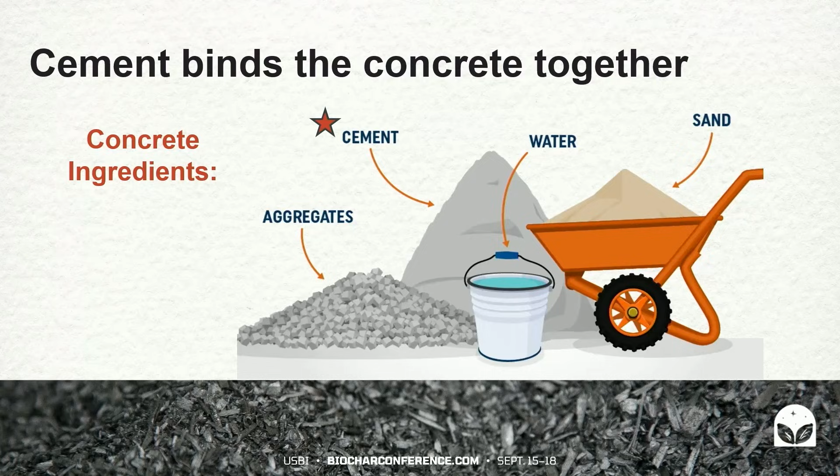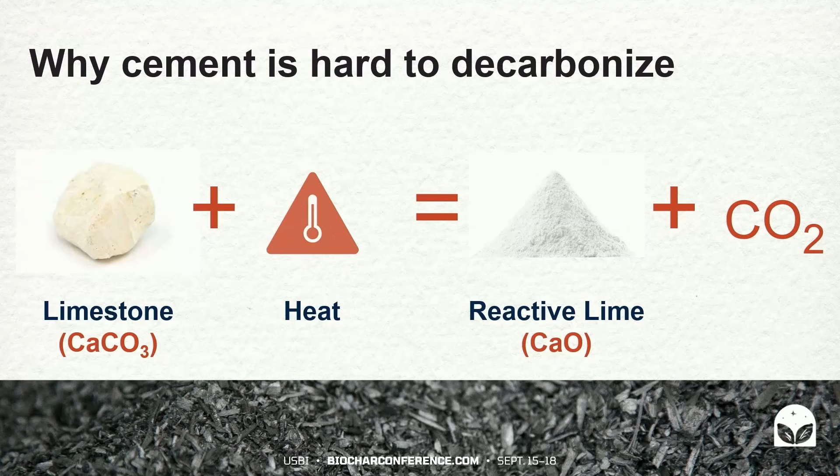That's one of the key ingredients in concrete, and it's the material that binds all of the other ingredients together. It's hard to decarbonize the cement industry because the carbon footprint is tied to the material itself. The CO2 is released during the process of converting limestone, calcium carbonate, to free lime, calcium oxide, which releases CO2 in the process. So unless the concrete industry stops using cement, the basic building block of concrete, we're really stuck with these emissions. And I wanted to find a way to change the narrative about concrete in this way.

So getting back to the question, why biochar in concrete? By replacing a portion of the cement in concrete with biochar, we reduce the demand for the most carbon-intensive component of concrete, and we store carbon that would be otherwise released into the atmosphere. So if we can put enough biochar in concrete, we can completely eliminate 8% of global CO2 emissions. That's equivalent to parking every passenger vehicle on the planet permanently.

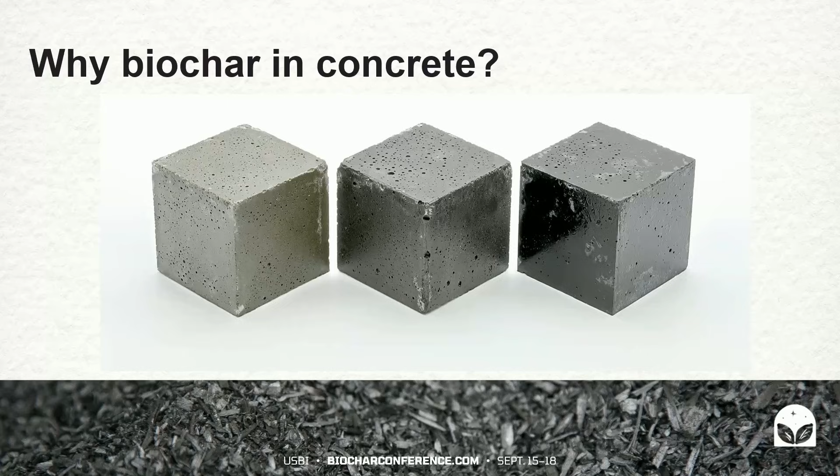But to do this, we have to have buy-in from the concrete industry. And that requires proof, trust, and consistency. In practice, every major project that uses concrete requires the materials used in the concrete to meet ASTM standards. Without them, every project has to have their own suite of testing for the materials, and the engineers face risk and uncertainty. Standards reduce this risk, build trust, and create pathways for broader use.

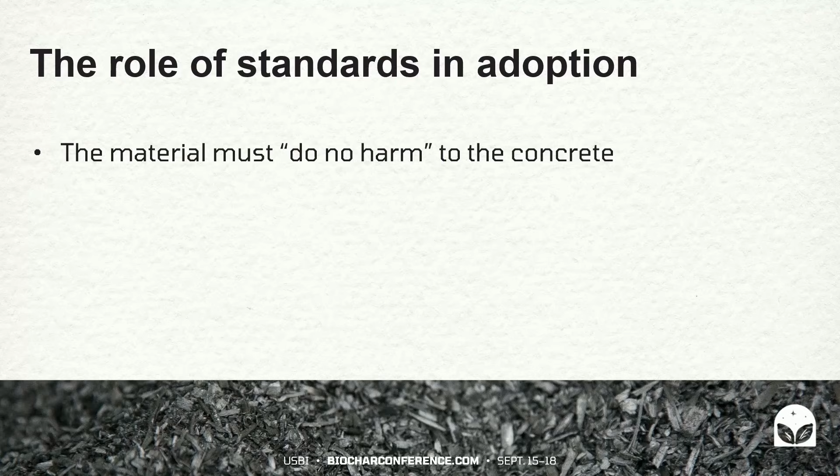In the case of biochar, a standard will tell producers how to qualify their material. It'll guide engineers how to specify it, and it'll give contractors confidence that performance requirements are met. It's the seal that people trust to say this material does no harm to my concrete. But with a material so versatile and so different than conventional concrete materials, what testing should be required for biochar?

Across academia and industry, research on biochar in concrete has exploded in recent years. When I first started in 2019, there was only a handful of papers. That has grown exponentially. I can no longer keep up with the amount of things that are being published on this. We've seen some evidence of strength improvements in some cases, durability gains in others, and of course, carbon footprint reductions almost across the board. But results are highly variable. I can name countless examples of the opposites of all of what I just listed. Feedstock differences, pyrolysis conditions, and particle properties all affect performance.

Without again going into all of the details for this, what I would say is that we've shown both good and bad results for alkali-silica reactivity testing. And the interesting thing is that what we're observing here, we don't actually even think is alkali-silica reactivity. So the test we're doing is designed to measure that property. We're getting bad results according to the test, but we don't actually think what we're seeing is alkali-silica reactivity. Some of these tests that are required for certification of concrete materials might not apply for biochar-based materials. But these tests will still be required to prove to the industry that the material does no harm.

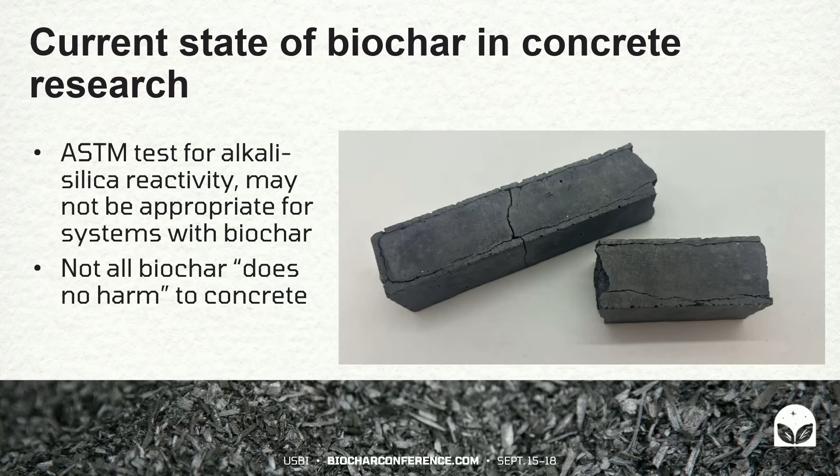Keep in mind that standards aren't neutral. They're built on assumptions by people, and when we introduce new materials, we have to ask ourselves whether those assumptions still apply. So I'm going to give you an example that's unfortunately a little close to home, my driveway to be exact. A couple of years ago, in a massive coordinated effort by the cement industry, the industry switched from a Type 1-2 cement to a Type 1L cement. Type 1L cement is really only different in that a portion of it is now a ground limestone instead of all Portland cement.

They are great under certain applications. They perform just as well as Type 1-2 cements, and they have a lower carbon footprint, so it seems like a win-win. And for the most part, it was really touted as a one-to-one replacement. So exactly the same, just replace this Type 1-2 cement with a Type 1L cement and you're good to go.

But in practice, many concrete finishers noticed a higher water demand for the product. It turns out that Type 1L cements release their bleed water a little later than Type 1-2 cements. And that bleed water is the water that rises to the top after the particles settle. So it's what finishers call the cream that allows you to kind of finish off a nice smooth surface on

the concrete. However, if you finish the concrete too soon before that bleed water rises, then all you do is trap the water underneath. And so you're left with a really porous surface layer that flakes off afterwards and leads you to something that looks like my driveway. It's very embarrassing to be a concrete material scientist and have a driveway that looks like that, by the way.

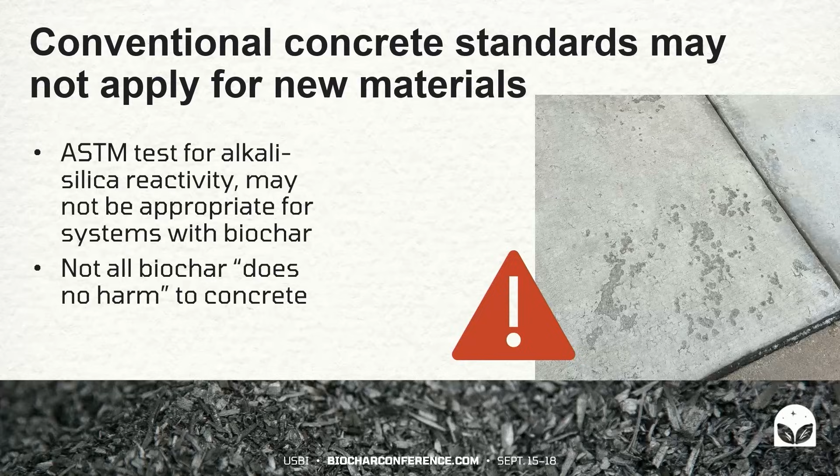Surface scaling is one thing. It's unsightly, but structurally it's fine. But structural integrity is another. So as we start considering incorporating these new materials into our concrete, we really have to be careful about how we evaluate the assumptions that go into our testing and our interpretation of data. We have to ensure we handle new technology carefully and responsibly.

So let me give you another example of where one of our assumptions didn't hold about biochar, because we've seen lots and lots of these in our testing. And again, we've seen contradictions to it as well. It's a really variable material. In our work with biochar cementitious composites, we've found that electrical resistivity and permeability don't always correlate in the way that you would expect in conventional systems.

And in case you're not familiar with this relationship, allow me to just explain briefly. Professors like to profess. In conventional concrete, electrical charge travels through the cement pore solution, so it's really closely tied to its permeability. That means the same pore network that facilitates electrical charge through the concrete also facilitates water travel through the concrete. So when you have a high resistivity material, the assumption is that you have a low permeability material.

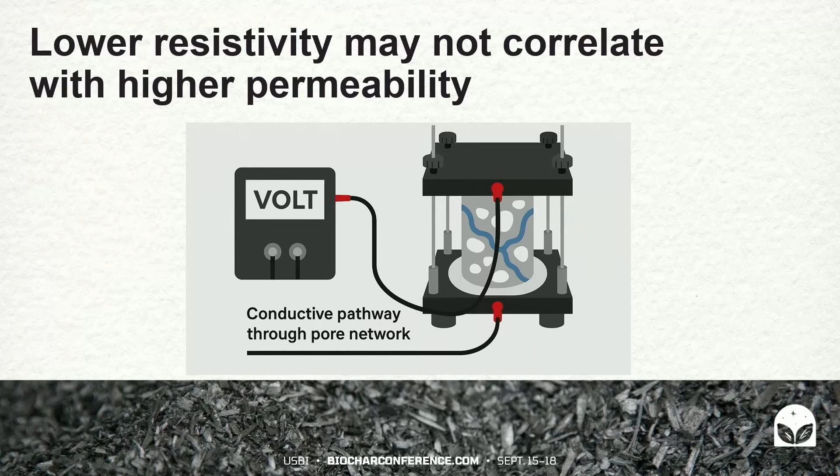So according to conventional wisdom, an increase in bulk electrical resistivity should correlate with a decrease in permeability, while a decrease in electrical resistivity should correlate with increased permeability. But instead, we show that in some cases, the biochar can both reduce permeability and reduce electrical resistivity.

In this case, the decreased electrical resistivity is attributed to an increase in pore solution conductivity, as ions from the biochar make their way into the pore solution. And so in literature, we can see claims that biochar can make concrete conductive. This may be true. We have not seen it.

Without verifying that the electrical resistivity decrease is caused by a percolating solid network of that conductive filler throughout the concrete, it's equally likely that the biochar is simply increasing the ionic strength of the concrete, or worse, increasing the permeability. The reason why I say worse is because that would have implications for long-term durability.

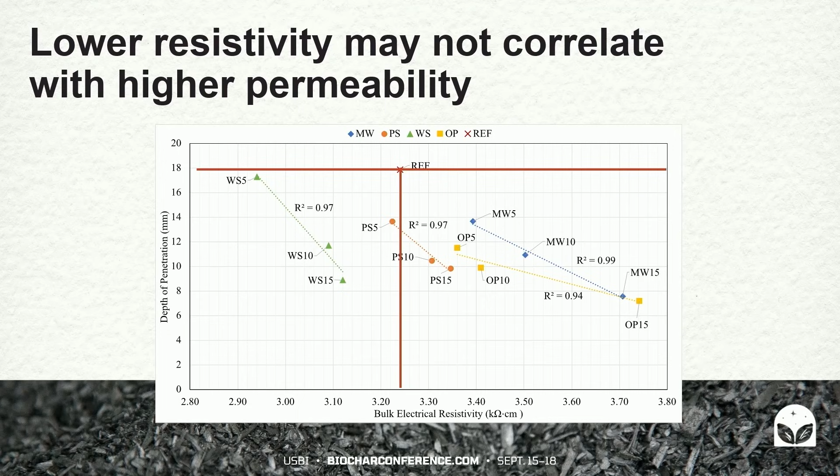Another example where our assumptions were not met by biochar is from freeze-thaw testing, so I'm glad that came up. Here again, we assumed the rules would hold, and they didn't. Again, conventional wisdom tells us that if concrete is sufficiently air-entrained, it should be protected against freeze-thaw damage. The air voids help reduce the tensile stress experienced by concrete as water in the pores freezes. So as ice crystallizes, the water is displaced into a nearby air void, and it can grow without causing expansive pressures that damage the concrete.

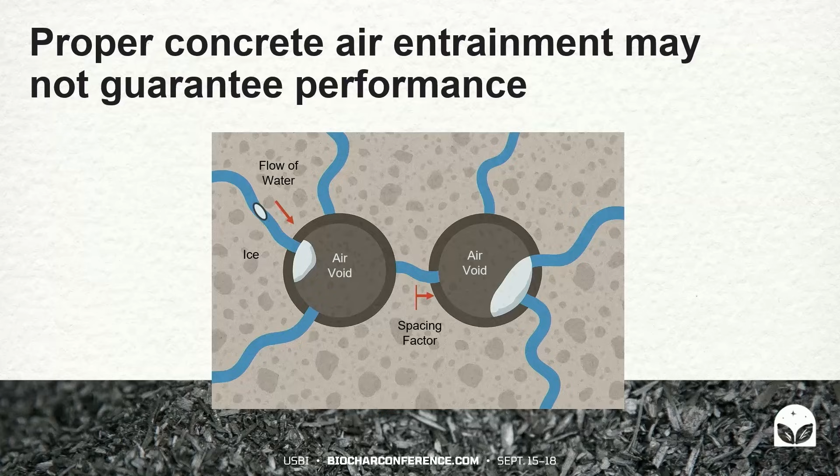Typically, if we have 6 volume% air and a spacing factor of 200 microns, spacing factor is basically the average distance the water has to flow into a void. So 6 volume%, 200 micron spacing factor, that typically means that the concrete is protected against freeze-thaw damage. However, when biochar is added to the concrete, the rule doesn't seem to hold.

Now, when we cross-sectioned these samples, we found that it had the requisite air void system. So what happened? Honestly, we're still trying to understand why. This is violating our assumptions. We haven't seen this before. We're trying to understand it. And this has been a material that's really challenged our assumptions from the very beginning and consistently continues to do so.

Now that we know this is a potential issue, we can protect the concrete industry against it by standardizing it, by requiring this testing specifically for our ASTM standard. But had we not tested it, would we have anticipated adding this to the specification? Almost certainly no. This is not a common requirement for material specifications.

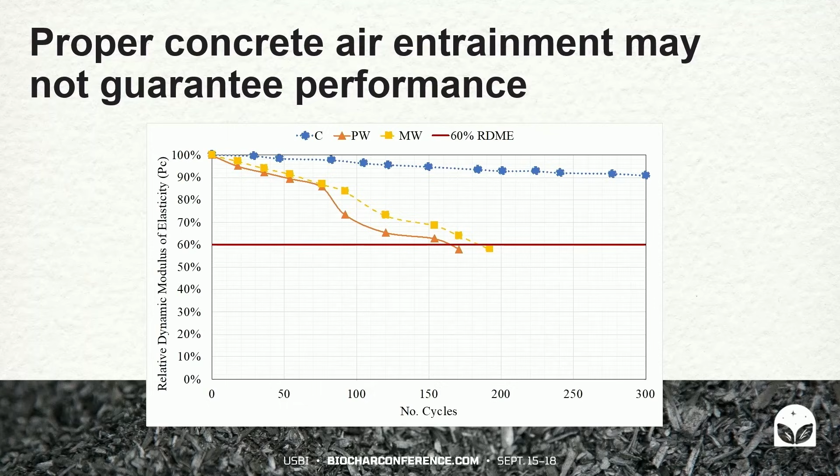So what are some other challenges for standardization? So first, there's the feedstock variability. Biochar made from wood is different than biochar made from agricultural residues. You all know this very, very well. And then second, as you've seen, we've observed lots of situations where biochar violates standard assumptions. So we need to be careful applying old assumptions to these new materials. I know I sound like a broken record, but I really want to just drive that home.

Third, we really do need reliable test methods for materials and performance characterization. The alkali silica reactivity test was a great example. It's measuring something, but it's not alkali silica reactivity. So if we want to measure alkali silica reactivity, we need adapted tests. That's just one example, but there are many others like it.

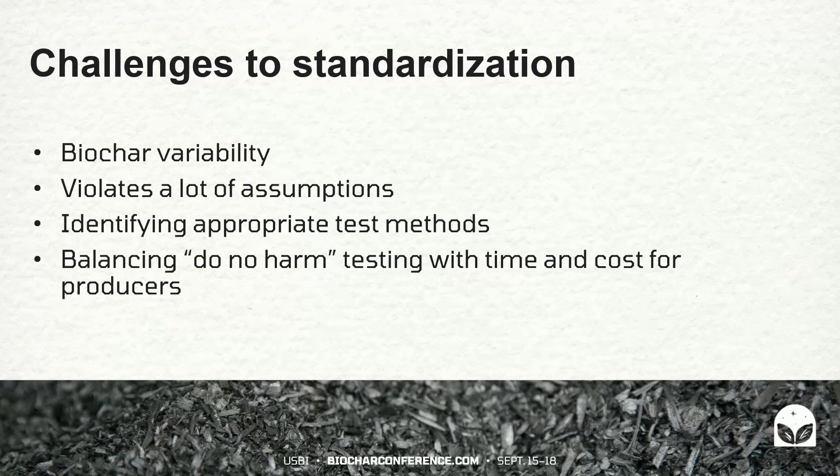And ultimately, we do need to ensure that we do no harm to the concrete. But there's endless testing that could be specified, right? Do we need to do them all for biochars? That would be very costly for the biochar producers and would probably be a great hindrance to widespread adoption. So we need to be sensitive to striking the balance between having our concrete protected, making sure the biochar does no harm, and not being overly burdensome on the testing requirements.

The good news is that ASTM provides a proven framework for tackling these issues. I won't go into all of what I wanted to say on this. I'm getting short on time. But what I really do want to highlight here is please get involved with ASTM. ASTM works best when there's a community of people from all different parts of the industry that are working together to make sure that we're making a standard that meets everyone's needs.

You know, if no biochar producers are involved in it, then all the concrete industry is going to do is tell you to test everything, right? That's not going to be to your benefit. We need everyone involved to get that input and make sure that it's a good standard that people can actually use to protect concrete, but also that's practical. Its standard is C09.28, so please look that up. Everyone's free to join. You don't need permission, and I would love to have your input.

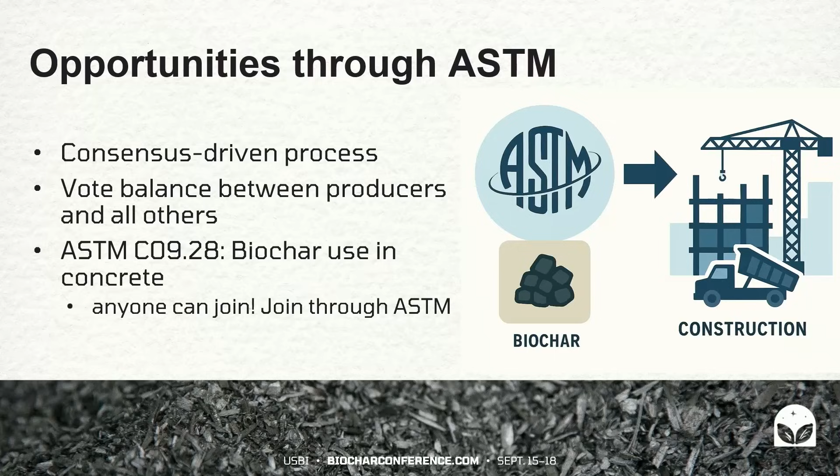Quickly, what do we know the biochar standard will include, and what do we think it will include? What we know it will include from our first meeting is that there are going to be types of biochar for use in concrete. That's primarily going to be based on particle size and carbon content. There's also going to be labeling requirements, indicating whether the carbon attribute is attached or if it's already been sold.

Please know carbon credits are pretty unfamiliar to the concrete industry. And so you need to be really explicit about that if you've sold your carbon credits. They are not going to know that. So we're going to have some language there. There's also going to be some report-only requirements for biochar composition. And there's certainly going to be performance test requirements. You can bet on that. What those look like, we're not sure yet.

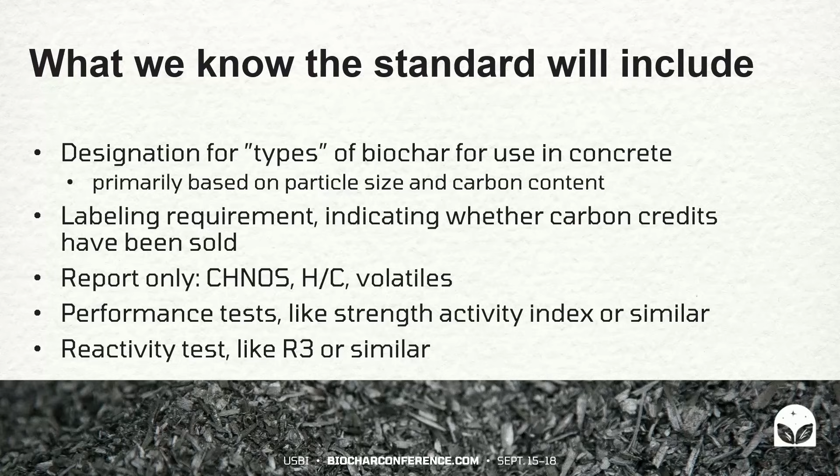Something like a strength activity index, something like a reactivity test, those are going to be in the standard as well. From our last meeting, it's also likely there's going to be some additional requirements. Some of them will be report only, just different compositional things like ash content, alkali content, chlorides, things that we know historically have impacted the quality of concrete. There's also going to be some uniformity requirements. So is your batch to batch variation within some tolerance? So you can expect that as well.

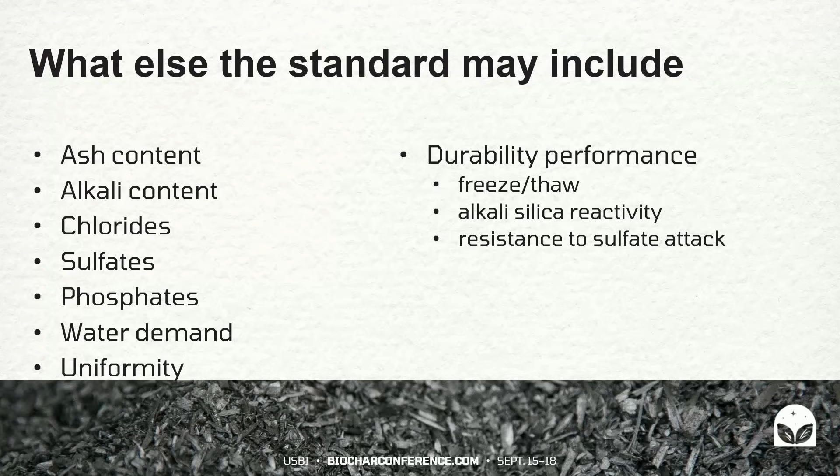There's certainly going to be some durability testing requirements. The durability tests specifically are kind of cumbersome. You can imagine those are the ones that take the longest. You've got to collect some data over time. And so we have to be careful not to over-specify things that don't need to be specified, but do specify the things that do need to be specified. So that's going to take some additional testing, but you can expect there's going to be something there.

To close, the journey to an ASTM biochar standard for concrete is both a challenge and an opportunity. It's about more than just testing protocols. It's about creating the foundation for carbon negative concrete to scale. By building consensus across research, industry, and end users, we can make biochar not just a promising idea, but a trusted material in concrete worldwide. We can create a massive, unprecedented demand for biochar. Thank you, and I look forward to your questions and discussion.

I also wanted to thank my students who have contributed all this work. I've only included the student pictures who got particularly dirty doing biochar, because I feel like they should be recognized for their hard, dirty work.